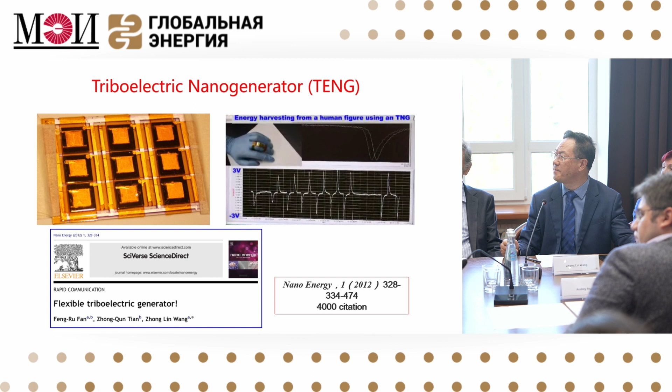And then you ask, what's the difference compared to what we have? What we have now is the electromagnetic generator, first invented by Faraday in 1831. It works well for higher frequency mechanical triggering, meaning with a steam engine you can do that. But for the energy distributed in our living environment, the efficiency is so low because the output power is proportional to the square of the frequency. Our TENG on the right-hand side is a new way because it converts unconventional, low frequency, low amplitude energy into effective electric power. We first invented it in 2012.

Now, what's the big difference compared to what we know? The first one is frequency dependence. It's very good for low frequency triggering, giving high output power compared to traditional technology. The fundamental principle is different: it uses the triboelectric effect and electrostatic induction, two effects, rather than electromagnetic induction. So the physical principle is different, and the performance, of course, is different. At low frequency, the performance is 10 times that of the electromagnetic generator.

The other one is amplitude. When the energy in our environment is at low amplitude, how do you convert such energy to electricity? We found for low amplitude, the performance is 5 to 10 times better than traditional technology. The other one is energy conversion efficiency. With a lower power input density, the conversion efficiency is 3 times better than the electromagnetic generator, even using today's most powerful magnets.

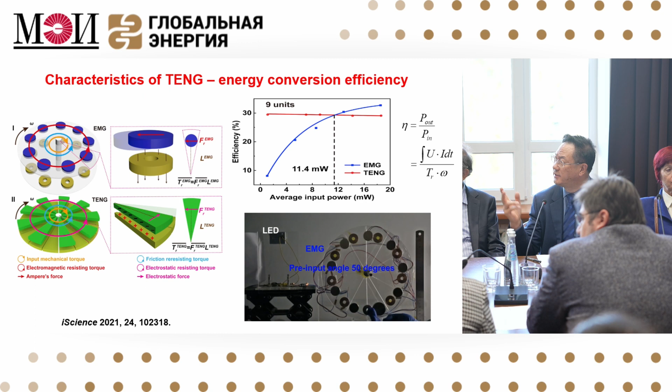Our performance here is high. So this is something you probably never heard of: a new way to convert energy into useful power. Okay, and this is the basic principle to compare. They say what material you can utilize.

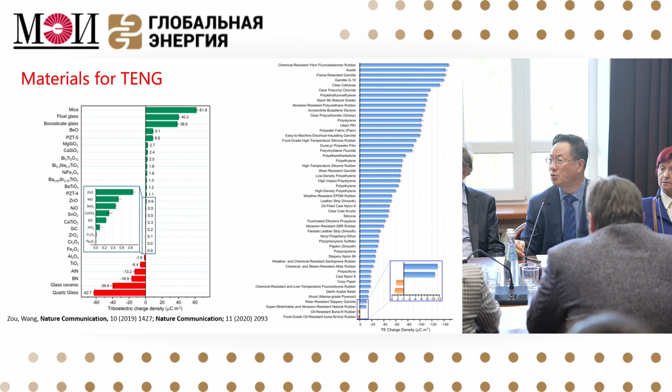A lot of cases say, oh, we use magnet coils, but this one no. They use organic materials, the materials we use in everyday life, fabric, a lot of things. So this material choice is broad, from organic to polymers. We use the triboelectric effect. So the material choice is broad.

So worldwide, since we discovered the nanogenerator in 2006, now 16,000 scientists from 83 countries and regions are working on this technology and related. Over 15,000 papers have been published in this field since our first paper. So it's a new way to utilize energy, different from wind, different from solar. Those you call new energy, it's just new compared to the fossil energy we use, okay? So this is the worldwide impact.

What's the application? First one is small powers. The second one is sensing technology. As we move into the smart city, smart society, artificial intelligence, we need sensors. This is a very good way to do that. I want to give you a fundamental impact of our science, okay? So what are the basic things this invention impacts in our science? Let me show you the impact.

Well, triboelectricity, everybody knows that. This has been around for centuries. But what's the physics behind it? Whether it is electron transfer, ion transfer, or material species has been debated for centuries. Until very recently, we found this is mostly electron transfer, because when you put two things together, triboelectricity occurs. Why? The atoms have been so close that the electron can transfer from one to the other. We did the spectroscopy analysis and found that's the case.

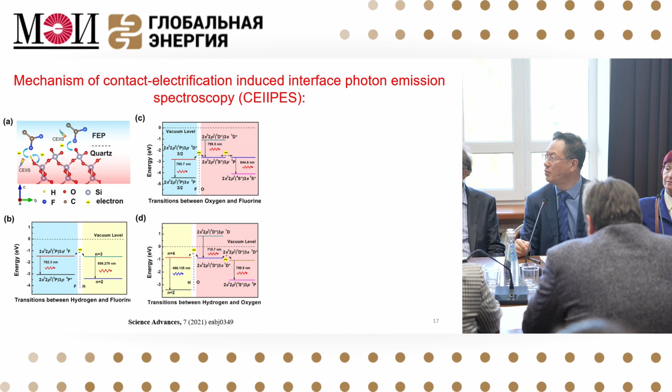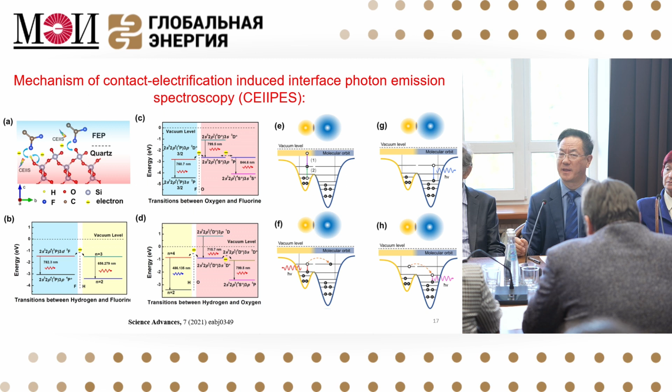The second one is, when these two things are together, if you have electron transfer, do you have photon emission? We measured that and found it truly has photon emission. So across the atoms, electron transfer and transition result in photon emission. We verified the model we proposed. So if you say something new, the science has to be new. Otherwise the technology is just incremental advances.

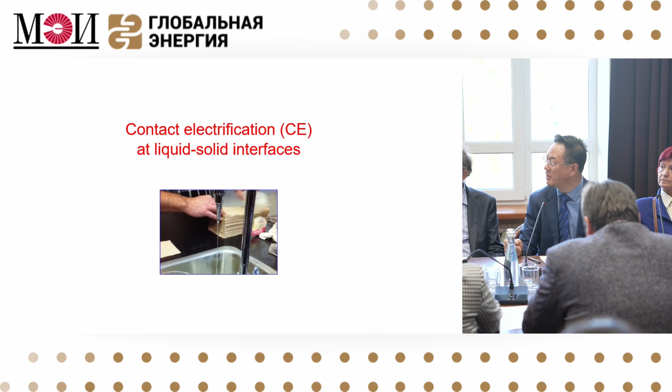Okay, so the next thing is, how about liquid and solid? Triboelectricity occurs not only between solid and solid, but also between liquid and solid. It's happening in our daily life. This is a very fundamental thing in chemistry, the so-called electric double layer. All chemistry and chemical engineering students study this, but it is subject to revision, because it is not only ion adsorption for the electric double layer, but also electron transfer.

So we did this experiment. We put a droplet of water on silicon dioxide and found that there is electron transfer. We can measure the charge decay mechanism as a function of applied temperature. And we verified there is both electron and ion transfer. That's why for electrochemical storage a lot of systems are unstable, because of electron transfer at the interface, which is something we did not believe before.

And we also tested different materials. Does this principle apply to all the materials or just a few select ones? We found it is a universal model. Not only silicon dioxide, but magnesium oxide, silicon nitride, titanium oxide, all this kind, it is very universal. Then, well, if water transfers electrons to a solid, is this true?

We used to believe no. We said water cannot become ions, but now it can. Water loses one electron and becomes a water ion. But the lifetime of the water ion is only 200 femtoseconds. A few years ago, experiments found this is the case. So water can lose electrons and become ions, but what does this ion do? It combines with other species in water and becomes radicals.

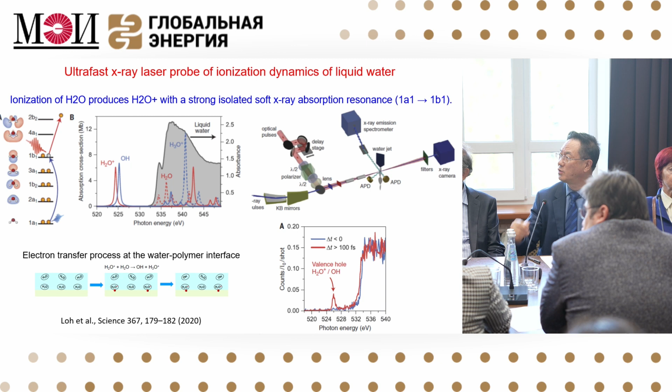So this is what we found just from a physics point of view, chemistry point of view. And this does support one. So therefore, we revised the formation mechanism of the electric double layer at a liquid-to-solid interface, because as you have electron transfer, some of the dynamics at the interface will change, because you have both electron transfer and ion transfer coexisting. So this is the first thing I want to show you, the fundamental impact due to the TENG invention.

The second one is what you can do. This can provide a new way to measure the charge transfer between liquid and solid quantitatively. When you have a water drop flow down, you can map the charge distribution as a probe for fundamental chemistry study.

They say, well, did we know about this before? When you do a chemical reaction, you always study the chemical reaction, but you don't know that there was an electron transfer. We measure this; due to charge transfer, you can light up a light. So something we used to do every day, but we didn't realize there's electron transfer involved until we found a reason for that. So I just give you a little basic of the science we found. Okay, so this is the scientific innovation.

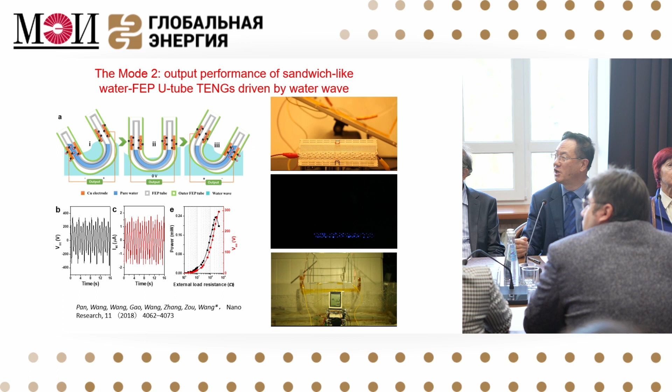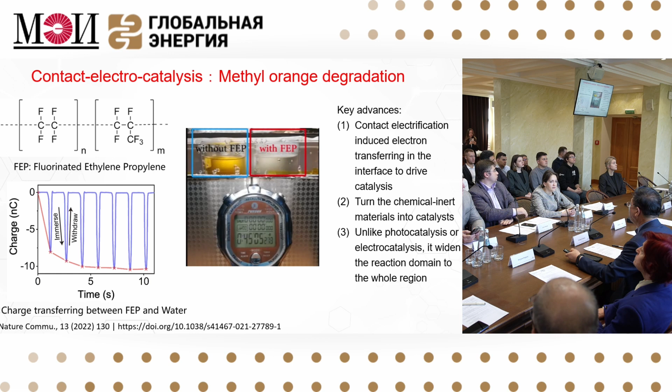Okay, the second one is: can you do catalysis using contact electrification? Because in nature, how does catalysis occur? It is contact electrification. We don't have the expensive man-made catalysts, but this has happened. We found it for methyl orange degradation. If you have FEP beads and you apply a sonic wave, it degrades. That's what happens in nature when chemicals degrade.

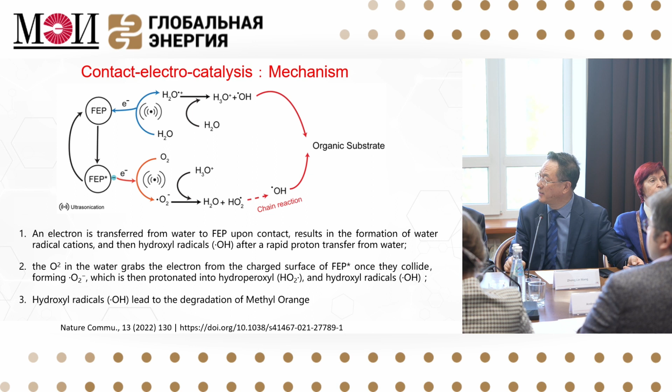So what happens if you have FEP beads? In contact with water, water loses one electron and becomes a water ion. The water ion combines with a water molecule again to form radicals. And then the FEP under the sonic wave releases the electron, and the electron combines with oxygen to form new radicals. That's the cycle that happens in nature. So flowing water never gets deteriorated, because you have electron transfer between water and substrates such as stones, right? So this is from a new principle.

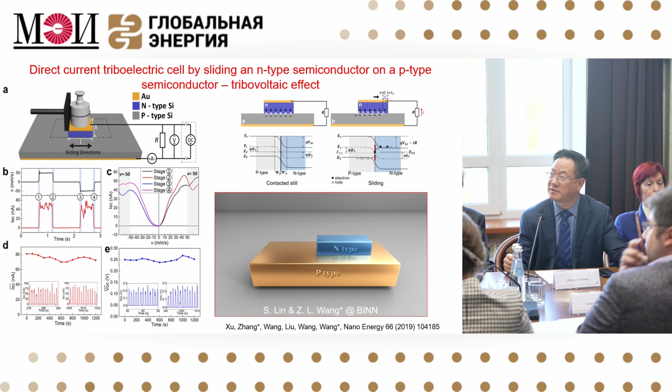We also found a new effect, the tribovoltaic effect. We know the photovoltaic effect: photons shining, you get DC out. But tribovoltaic can also happen. If you have an N-type semiconductor sliding on top of a P semiconductor, you have a DC current come out. This is something we didn't know before. Just 3 years ago we found that if you slide P on N, you can have DC current out. This is a new effect called the tribovoltaic effect, and it can be used for sensing and also for semiconductor data reading.

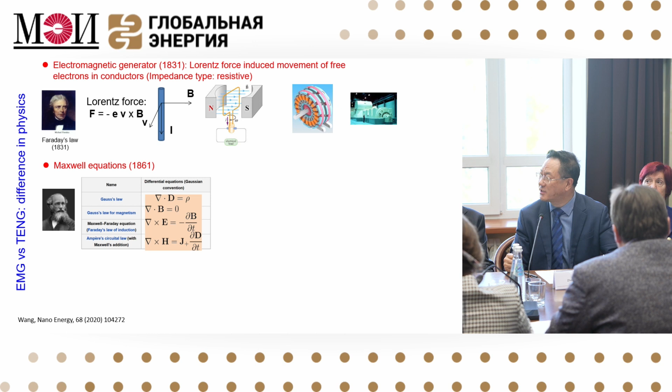Okay, so this is chemistry. How about physics? How do you impact physics? This comes to the theory of electricity and magnetism. We want to quantify that. If you have a conductor that cuts electromagnetic flux, you can generate power. We've known that for decades. Now, there are two kinds of current. One flows through the wires; that's called conduction current. The other is called displacement current, which is transmitted through space, which Maxwell invented in 1861.

But those equations were derived on an assumption. They assume all the media are stationary; nothing moves. All electromagnetic theory is derived on that assumption, but this assumption is rarely mentioned in textbooks. Students just accept it as it is, okay? So now we say the media is moving. You have to revise the displacement current, which was first unified in the 1900s, 120 years ago.

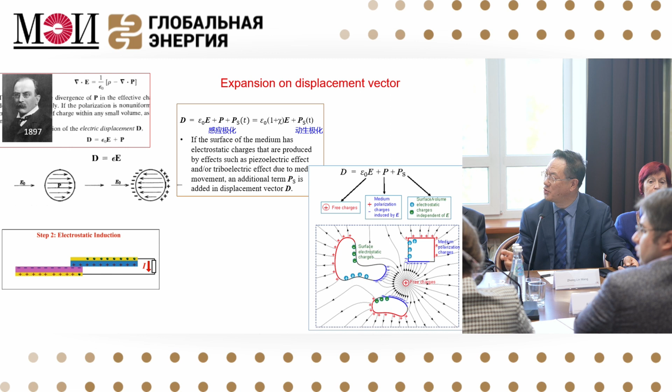Because the media is moving, besides the displacement vector, you have to introduce another term due to motion. If you have relative motion between one and another, you have to add another term, with which we are able to quantify the output power of a TENG. So from the experimental side, I propose a new theory, adding a term to the equation. This shows the fundamental impact, with which we can quantify the TENG output and compare with theory, and it progresses very well.

However, as you advance, new experiments show new challenges. And the challenge is this: media motion can give you electromagnetic radiation. Let me give you one example.

If you have a windmill around you, this thing rotates and affects animal behavior and human behavior nearby. Why? You have low frequency electromagnetic radiation. So this is generated by motion, but this was not included in the original equation. They did not consider this in Maxwell's time. But now you have to, because we measured this experimentally.

I want to show this subject to students. You can learn from classical physics, but at the same time, it's subject to expansion. So we found experimentally that we can transmit power using medium motion. Another one is that we measured this underwater. If you have voice sounds to a TENG, it generates displacement current and can transmit a signal underwater a few meters away. This used motion of the medium for electromagnetic wave radiation.

This is something we didn't know very much before, and we measured this experimentally, which makes us rethink the theory. Can we expand it? This is the experiment; we observed this due to medium motion. However, if you look at textbooks, they say all these things come from the flux rule. The flux rule was presented by a Russian scientist, Lenz, many years ago. That's the power. All power generation is based on that principle.

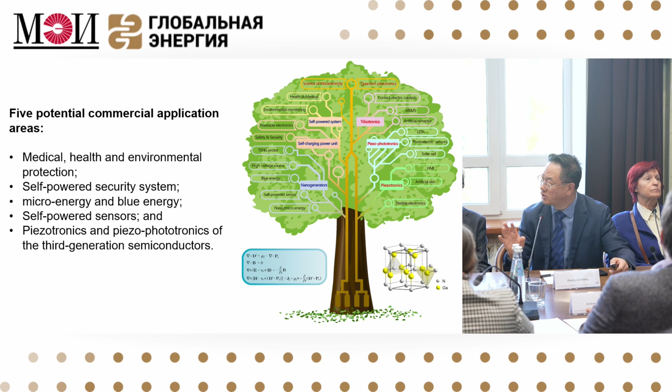First one, pacemaker. 14 years ago, I started with students: can we make a pacemaker self-powered without replacing the battery? After 11 years of work, we did it. For the first time in the world, using our TENG, we can make a pacemaker self-powered continuously. So this has impact on implantable medical devices, a new way for healthcare. So this is the first thing I show you, the self-powered pacemaker.

The second one is infrastructure. You can have meters for everything: water, oil, and gas. But you have to send somebody to read them, to give you the numbers. Now, what's the flow rate? What's the flow speed? What's the pH? What's the chemistry of the water? Can you do the analysis remotely, especially underground? Today a lot of infrastructure is underground. You cannot send a human to do that.

A self-powered chemistry and flow measurement system for water. We made this possible right now. We have already set up a company to commercialize this infrastructure monitoring system. For a whole country, like Russia, a huge country, how can you monitor many things across long distances? It becomes a challenge. So this makes use of the TENG-driven self-powered system.

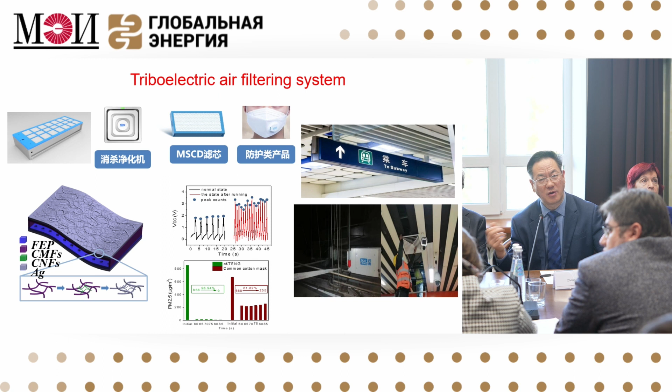The next one is the air filter. About 7 years ago, China had a pollution problem. Now it's much better. How can you do pollution removal and air filtering? So we started this company 7 years ago. Now subways and office spaces already use the triboelectric air filter, already commercialized and on sale. Now we're already in business. So this is triboelectric air filtering, utilizing the principle.

The other one is medication. Especially for Chinese medicine, they have to diagnose through the pulse, but measuring the pulse becomes a challenge.

Only a skilled person with many years of experience can tell you something about your health problem, but that knowledge is unable to transfer from one person to another. Can we digitize this? Can we make these things transfer? The younger generation can learn from the old generation without going through many years of experience.

So we use this technology to develop medical devices to quantify and digitize that. This is one example, and the other one is the patch. Sometimes when we do sports, we feel muscle pain, and we put a little patch on top of that for pain relief. We use TENG to stimulate the penetration of the drug into the skin much more effectively, 5 times faster.

We also have the professor's beauty supplies. This can get rid of wrinkles and make the skin younger and healthier, using this field stimulated medical device. Same principle, but it depends where you apply it.

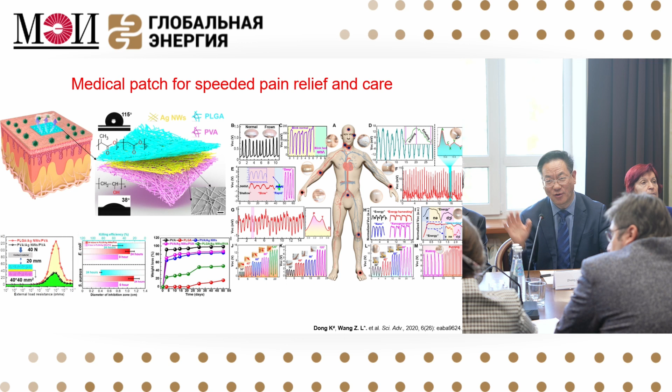And then you have healthcare. Some people have a leg problem. You go to hospital - how do we know about recovery? So we make these sensors at the joints. If recovering, they can tell you how many cycles and how much force you apply during recovery. This is all needed for robotics, as well as healthcare - they need the sensors.

If you use an electromagnetic generator, it's very heavy, bulky, and consumes a lot of power. But using plastic, it's very light and useful. This is the principle we invented, TENG, in this process. Okay, this is for healthcare.

We could put it in shoes. And when you're walking, the shoes can enable GPS positioning, because the power put in the shoe insole, as you're walking, gets automatic location tracking. This is for elder person care, as well as children's care. This is small power, but useful for some purposes. GPS positioning, self-powered shoes for that.

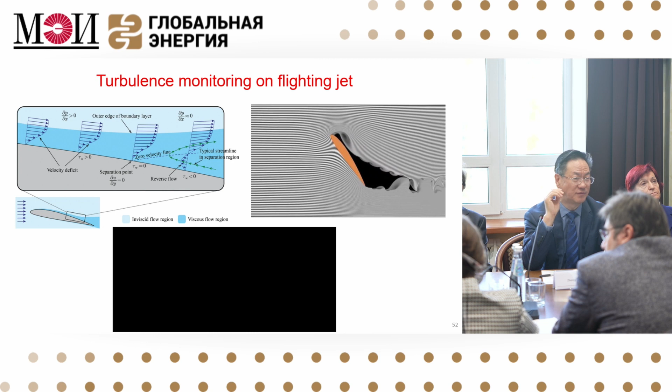Even for aircraft, turbulence happens. But monitoring turbulence is always based on simulation - you cannot do that accurately. So using our TENG, we put it on the surface of the aircraft wing. This is a simulation - you can see when the aircraft wing angle changes, turbulence occurs, but it's not good for flight safety.

They put a string on the wing and just watch how the string flicks - they can tell you about turbulence, but it's a non-digital way. So we put this in a digital way - the TENG is put on that. When the wind goes through, it detects normal pressure and flow speed as well - all these things can be detected. So it can transfer to the aircraft industry as well as other machines. This is the way we invented it for the first time for this purpose, for aerospace engineering.

You can see, not only for power, but for sensing. So this is the turbulence monitoring on flights.

Anything you can think about - environmental monitoring. We can make this little wind generator, put carbon monoxide sensors, so you have a box that can immediately send to the cloud the concentration of carbon monoxide. Especially today with carbon neutralization - do you know how much carbon you emitted? You can only estimate from GDP, but GDP is not a measure of carbon emission, okay?

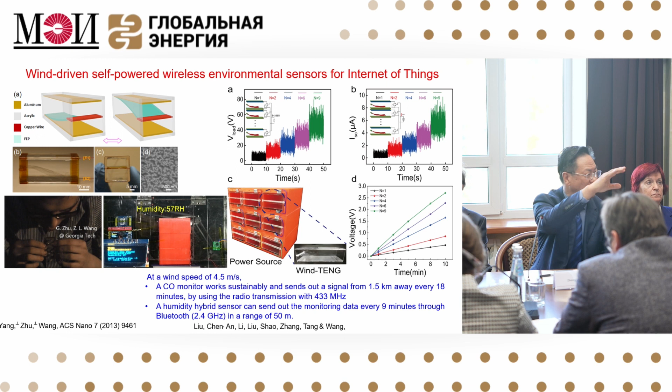But you can locally distribute that, you can measure this, you can see which area has more carbon emissions than other areas. So a self-powered system for environmental monitoring - gas, chemical, fire, anything. Especially in a vast environment, who's going to go there to check if there's any fire or anything happening? Use distributed self-powered sensors - you don't need to maintain them in any short period of time. They just send signals automatically to the cloud, and you get it at the same time.

Now, how can our invention make human society sustainable?

Can we make something for the future of energy? Let me show you the potential. There's a report between the Chinese Academy of Science and the European Academy of Science that says the possibility to substitute fossil energy is to use ocean energy. This is the future. We've used up all what we have on land. Where are the ones left? In the ocean. But the ocean is very complicated - it's vast, low frequency, random, but deep and complicated environment. Still, that's what we're going to have for the future.

So when are we going to need this? I think we need it right now, because we're going to run out of fossil energy by the end of this century. How many years left? 70, 80 years. It's very short. So if we don't develop something innovative and creative right now, we're going to run into a problem by that time. This is the blue energy dream we want. But we know we want it - how do we do it? A lot of things, how do you do it? The politicians tell us we need it, but how to do it? The ocean has 76 terawatts, which is 4 times world power consumption today.

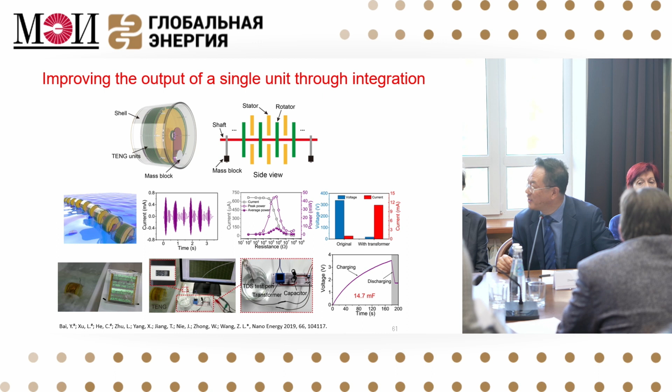Then the other question is, how can you make this sustainable so that it lasts for a very long time? So not only do we make a big ball, we make small balls - many balls in the volume. In the water, you're floating like that, with many things moving inside. But this whole ball is packaged, so as long as there's no water infiltration, you're fine. So outside, if any debris grows on it, it does not affect the action inside. This is the ball's 3D design.

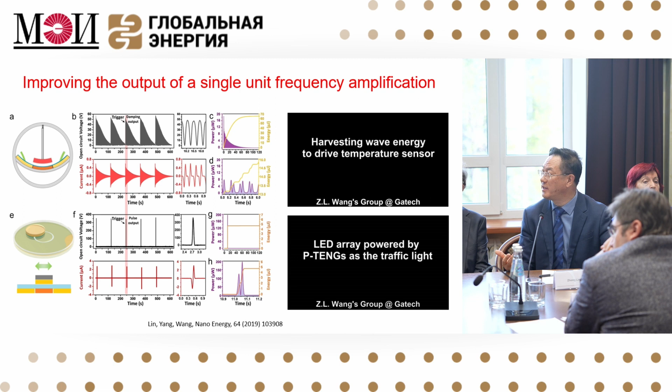In the ocean, the wave goes at a very slow pace. Can you accelerate that? So we use a pendulum structure - we're able to accelerate the motion, so you'll be able to improve the output performance dramatically, because you accelerate the movement using this pendulum structure.

Even if the water strikes once, this thing can oscillate for many cycles. So this is the way we develop for high output. If you struck this one, this pendulum structure oscillates for many cycles, and we can get a total energy conversion efficiency of 28%. This is at a low pace, and this number is phenomenal. You can integrate this across the board and achieve this phenomenal performance.

We have to do everything ourselves, because there's nothing available in the literature we can look to. So we have to do this with our own team. This is 28% efficiency at the beginning.

Then did you get any success? Yes, we put it in the ocean. You see the ocean wave there. We're able to generate, per cubic meter of water, a peak power of 80 watts. This is measured. On average it's 13 watts per cubic meter.

Traditional technology can give you about 5 watts, so even this number is 2.5 times that of traditional technology, even though they have developed this for centuries. But this is just the beginning. From an idea to today, it's only 6-7 years.

And it works. They make this light tower powered by it. The battery for this light tower can be systematically charged by this water wave energy power generation. So this is the beginning. It shows you the life for the future.

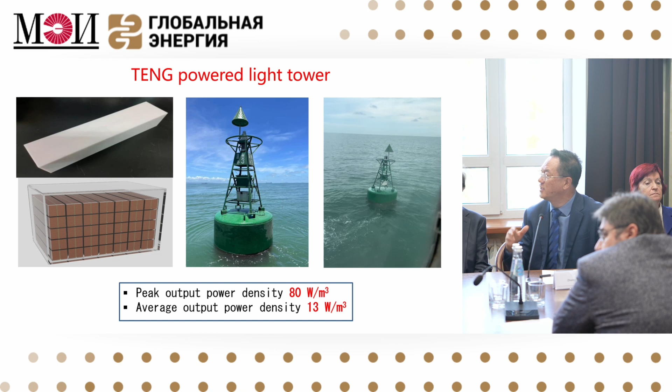We demonstrated this recently. You see the box we made. In the future, let's look at how much power could be generated. I'll just use a simple example: if you have a surface area of the ocean like Beijing city, and use 1 meter depth of water, the power generated would be 20% of the power consumption of China. But for the ocean, there's a lot of unused space.

It just sways there. Gravitation is there, right? But gravitation is always present, so this is also sustainable—day, night, continuous. Evening is even better because of the moon's motion, which helps even more. So it's sustainable, constant, and independent of weather. With solar, today is a good day, but yesterday was not a good day—it's unpredictable, unstable, and very hard to integrate into the grid.

So if this can be made possible, we can integrate this power into the grid along with other sources. I predict this is the blue energy dream for the future, and we're going to work very hard toward this dream. This just shows you the way we do it. So what's the solution? It's called hybrid: we have solar, wind, and water wave energy, called blue energy. These three can be integrated together to form an integrated approach for the sustainable development of humankind.

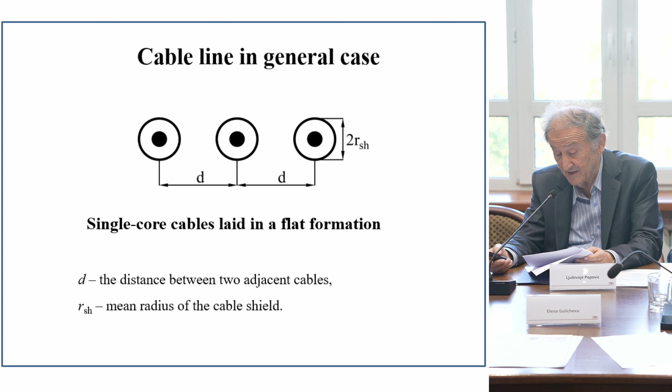Thus, if we perform a simulated ground fault and assume an arbitrarily large number of surrounding metal installations, the previously presented equivalent circuit should be supplemented as shown in the next figure. This equivalent circuit is complete from the standpoint of the number of its elements, but is not without some idealization and approximation of the real electrical circuit.

The fact that some of the metal installations are grounded at certain places has been disregarded. However, this fact is not important because we analyze only the induced currents that, as is well known, circulate only in the axial direction through the conductors, and as such cannot produce any potential on them toward the earth. Also, due to this, it is not relevant whether these installations are insulated or not.

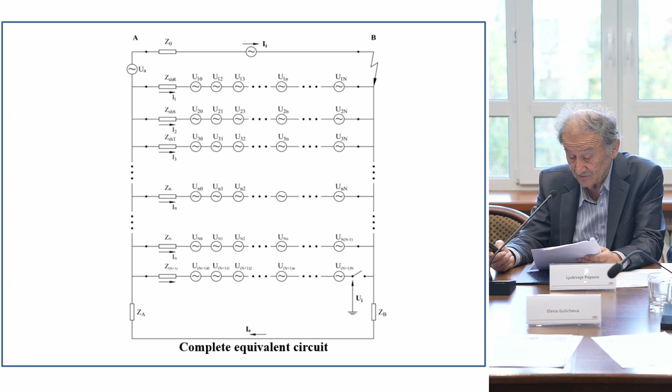Based on the measured values of these two currents and the analytical part of the methodology, it is shown that any other data about the surrounding metal installations are not necessary. All of them are implicitly involved through the values of these currents. These are the currents on the top of the equivalent circuit. The analytical part of the methodology is based on the introduction of an equivalent conductor substituting all surrounding metal installations from the standpoint of their inductive influence.

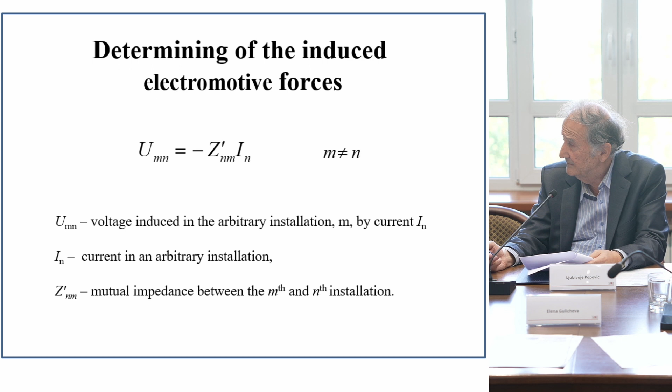The only measured quantities are currents through the phase conductors, by ammeters. As can be seen, the additional phase conductor is connected at its ends in such a way that it represents an additional neutral conductor during the measurement.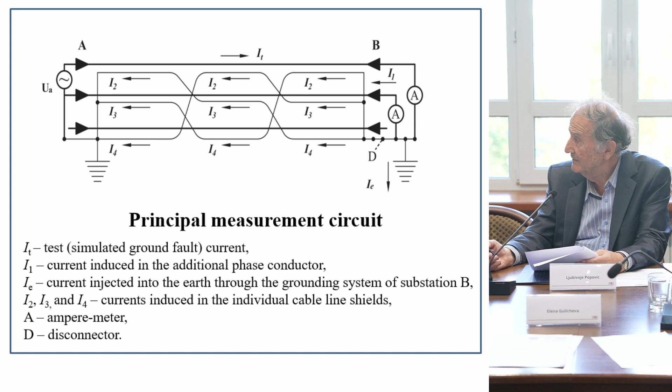When we introduce an equivalent circuit, the considered cable line prepared for the measurement can be presented as a relatively simple equivalent circuit shown in the next figure. Yes. The previously given equivalent circuit is much more complicated than this one, but it is reduced by introducing this equivalent circuit to this one.

Based on this one and the previously presented complete equivalent circuit, it is obvious that the arbitrarily large number of unknown induced currents is substituted by only one induced current, II. Also, numerous known and unknown surrounding metal installations, including shields of the considered cable line, are substituted by only one equivalent conductor, or circuit maybe also.

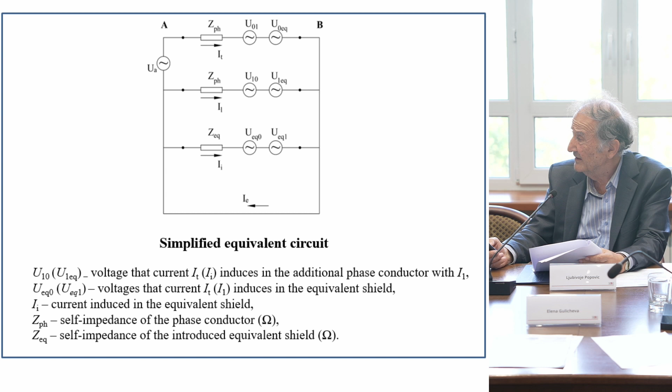This conductor has to satisfy the condition that currents IT, I1 and IE remain unchanged after its introduction. These are the conditions of equivalency. According to the simplified circuit, this condition can be expressed by the following system of equations. Thus, all the previously shown circuit can be expressed only by these equations with unknown quantities.

The analytical expressions for the impedances of the phase conductors are well known and presented in these equations. These are well-known expressions based on Carson's theory of current return path through the earth. Then, however, for solving the previously presented system of equations, it is also necessary to have the analytical expression for the self and mutual impedances of the introduced equivalent conductor.

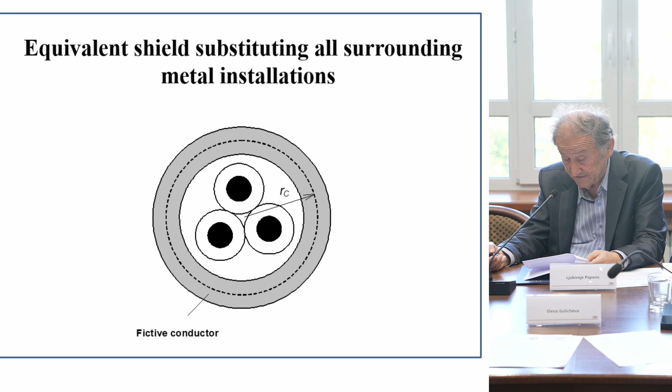However, the equivalent conductor imagined in the finally developed methodology is somewhat different, as shown in the next figure. The additional phase conductor in this figure is marked differently, in a lighter shade, to indicate that it serves as an additional neutral conductor for the purpose of the necessary measurements.

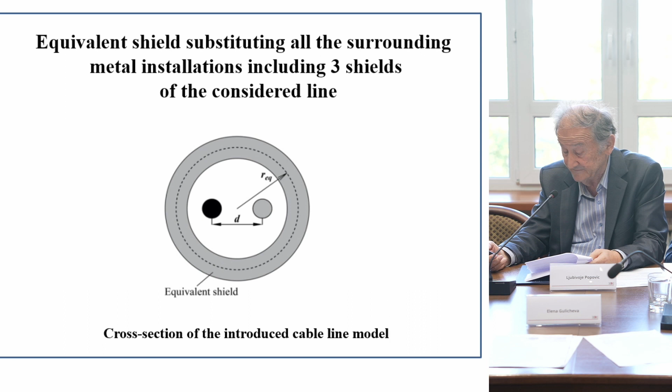Thanks to the line model formed in such a way, the necessary analytical expressions become known in advance and are presented in the next slide. These are equations that give the relationship between the parameters of the desired equivalent conductor. On the basis of these expressions and the measured currents IT and I1, the previous system of 2 equations can be presented in the following manner.

Since the presented equation gives the relationship between complex quantities, it can be presented as a system of 2 equations in which RE and IM represent the real and imaginary parts of the given expressions. In this system of equations, according to the previously given analytical expressions, the only unknown quantities are the longitudinal resistance and mean radius of the introduced equivalent shield. Instead of an equivalent conductor, we imagine an equivalent shield.

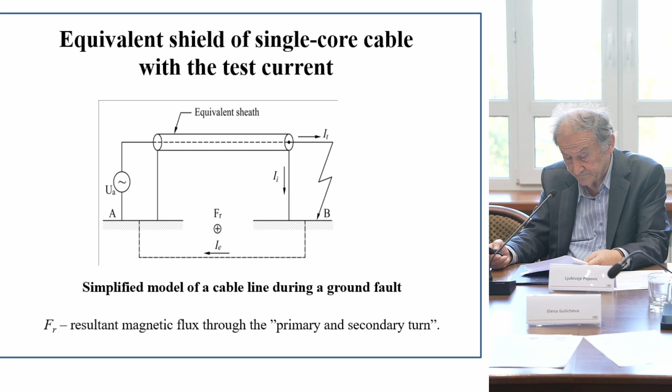All other metal installations, including the sheaths of the considered cable line, are involved in this only one equivalent sheath. During normal operating conditions of a cable line, we have inducing currents in all three phase conductors.

In that case, the total inductive influence on an arbitrary surrounding metal installation can be determined by superposing the voltage and current induced by each of the phase conductors. Each induced voltage determined by the presented procedure has to be superposed with the other influences, induced voltages or currents, determined the same way, depending on what you want to have.

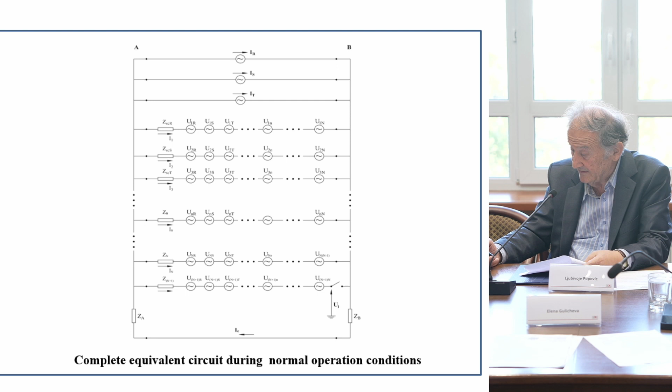Then this transformation reduces the problem of determining the series and sequence impedances of the cable lines to the simple case from the standpoint of the necessary calculations. This is the case when only the considered cable line exists in the whole surroundings, and when the cross-bonding technique is not applied. But with these transformations, we obtain data for the cable line in normal operating conditions.

But determined in such a way, the shields of the cables include the influence of the surrounding metal installations. For the reason of increased security, the series impedance should be calculated using the parameters of the equivalent shield that corresponds to the single core cable that is under the smallest inductive influence of the surrounding metal installations.

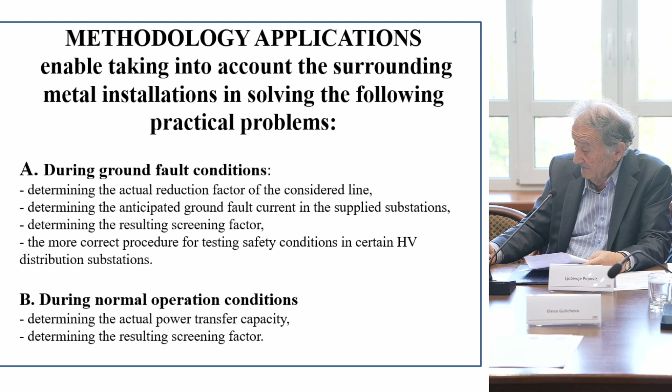During normal operating conditions: determining the actual power transfer capacity and the resulting screening factor. Finally, quantitative effects. Quantitative effects of surrounding metal installations depend on the degree of urbanization, but on the basis of experimental measurements performed in the power distribution network of Belgrade, we obtained that it can be up to 40%. This is a pretty large enlargement.

But the influence on the ground fault current distribution is much larger. It is shown that the current passing to the ground is 5 times less than was considered before. This dramatically changes our perception of this problem all over the world. People think this problem is 5 times greater than it really is. The same situation is with the inductive influence on any one surrounding metal installation. That's about 5 times less, in areas with a high urbanization level.

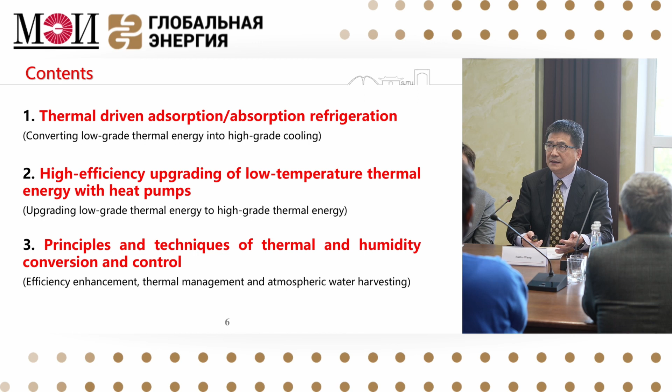When I got my PhD in 1990, there was a new Chinese solar heating industry, and I collaborated with them. This industry grew very quickly. When we had enough solar collectors, we needed to consider whether this solar heating could be used for cooling in the summer. So I first did research on thermal-driven adsorption refrigeration.

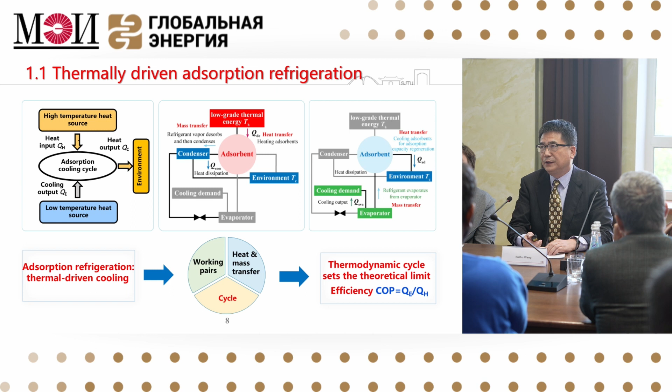So using silica gel water, or activated carbon ammonia and activated carbon methanol, for example. So we developed this kind of system, and especially to make a cycle, because we need to have an adsorption process. It's intermittent. So when there is adsorption, it causes evaporation or cooling, but the other adsorbent bed you need to heat to be regenerated, and then you get condensing. So with these two adsorbent beds, we could make switches, in this case to give the cooling function continuously.

So in the early research, many people considered that if you have two adsorption beds, you need to consider heat recovery. In this case, you could use the desorption bed with high temperature, so you take some heat recovery to power the adsorption bed for the second generation. So this way we make good use of temperature potential. This is so-called heat recovery. So my invention is something different.

Based upon this, if we have two beds, what you could see is that when one bed has finished desorption, you get the pressure at the condensing pressure, while the other bed is in adsorption, so it works at evaporation temperature, evaporation pressure. So we still have the pressure potential difference. So I considered whether you could move the vapor from the high pressure bed to the low pressure adsorption bed. So we just make a connection between these two beds, and just before the switching, you move some vapor and direct it to the other adsorption bed.

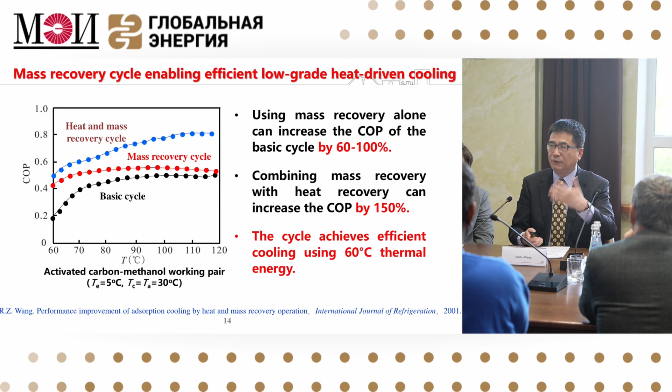So then, in the year 2004, I designed and manufactured such a system. And this system shows the operation with two beds, so we have a single bed with a condenser and evaporator, and it goes between these two processes. And we have so-called mass recovery, and usually this is powered with solar heating at 60 to 85 degrees, and for cooling to generate about 10 degree chilled water, the COP value could be about 0.4 to 0.6.

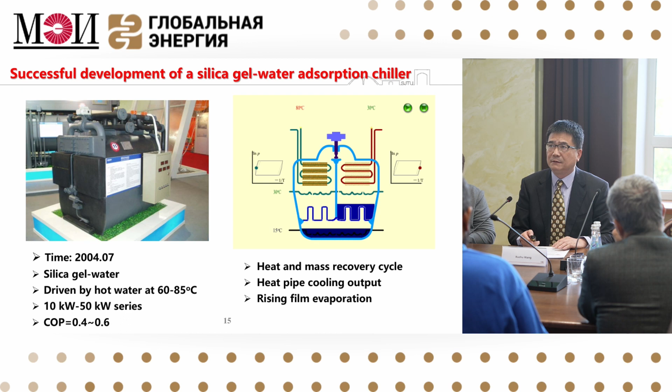So then based upon this research, we continuously developed a lot of units, adsorption chillers and also adsorption ice makers. And I also wrote a book called Adsorption Refrigeration Technology: Theory and Applications. And what I found is that these mass recovery cycles are now commonly adopted for every kind of adsorption chiller in the world. So all the chillers available in the market use our mass recovery cycles.

Originally I paid attention to how to make efficient use of solar heating for cooling in summer. But really, that's a problem, because summertime is not a long time, so for solar cooling the payback period could be long, maybe 5 or 6 years. So then I considered whether it's possible to find industrial waste heat. If you have such waste heat, you could use it for heating and cooling all year.

Now we have data centers. Data centers now have about 50 to 60 degree hot water. Usually the hot water goes to the cooling water tower and is cooled down to about 30 to 40. And then this water comes back, and electrically driven water chillers cool it down to about 20 degrees, and then it goes to the air conditioners or air-cooled racks for cooling.

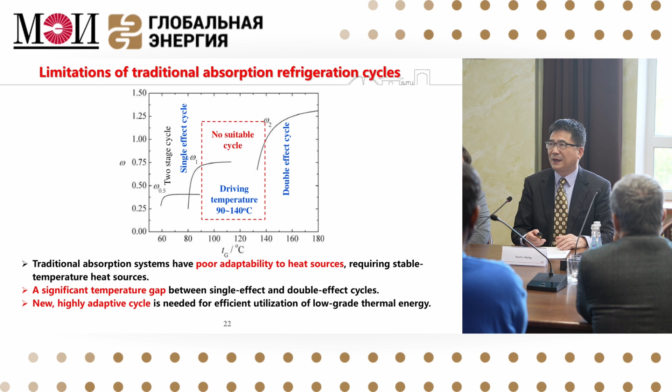So in this case, I suggested the so-called 1.N effect. Then later, I renamed it the so-called variable effect cycle. This solved the problem - we just added a high pressure absorber, HA, and then a second low pressure generator.

So by the generation at the high pressure, high temperature generator, the steam vapor pressure is not that high. But if it comes to the high pressure absorber, we could still generate this kind of absorption heat with a temperature more than 85 degrees.

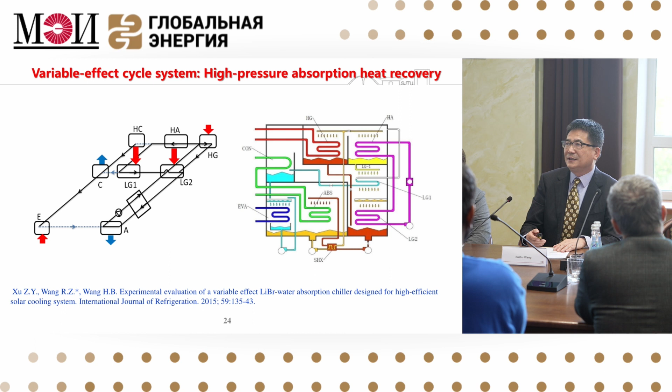So in this case, we could develop such a system, and on the normal used system we just added on the right side just 2 heat exchangers with a pump to circulate the absorption heat to generate the low pressure, the second generator. So in this case, we could create this effect, especially for solar utilization for cooling, for example.

So if the heating source is between 90 to 140 degrees, now we could get a COP value depending on the heating source temperature. In this case, the COP we could see ranges from 0.7 to 1.08, this is for 120 degrees centigrade. So in this case, we created and also commercialized this kind of variable effect lithium bromide water absorption chillers.

In this case, we could make good use of the thermal grade of heat.

For this research work, I received contributions and the award from the Institute of Refrigeration of UK, the J and E Hall gold medal, because we developed new ways for efficient cooling for air conditioning with adsorption chillers, and also the International Sorption Heat Pump Conference Georg Alefeld Memorial Award.

The second thing I want to say - the first was for cooling, the second I consider heat pump, upgrading the temperature. If we have waste heat, is it possible to upgrade it and make it useful again? So this is the so-called high efficient upgrading of low temperature thermal energy with heat pumps.

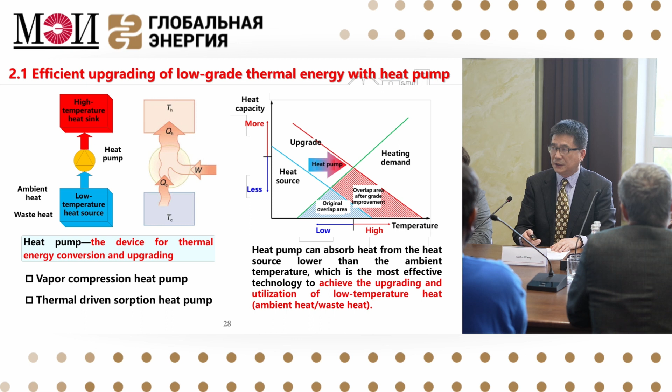So in this case, 1 kilowatt heat electricity, if it's electric heating, gives 1 kilowatt. But with a heat pump, 1 kilowatt could absorb, for example, 3 kilowatt from the air source, then release 4 kilowatt for heating. So this is the concept for air source heat pump water heaters, with a COP about 4.

With this kind of concept, I needed to commercialize this and develop this kind of infrastructure. I made commercialization in the year 2003 - that's the first manufacturer in China using air source heat pump water heaters. In 2011, we considered this kind of air source heat pump with hot water as a hydraulic system for space heating of buildings with a fan coil unit. In 2018, I did another research because I considered air source heat pump could generate hot water and space heating, and whether it's possible for steam generation.

So this third project is about steam generation, meaning we need to get the temperature lift to more than 100 degrees centigrade. In this case, we tried the possibility to replace coal-based boilers, because for decarbonization, it's so important.

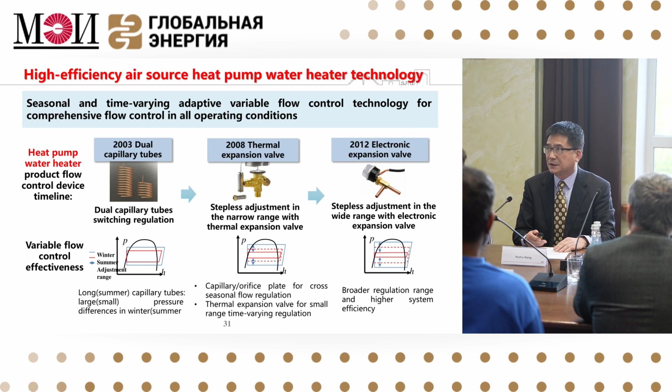Later, we tried thermal expansion valves, also in combination with capillary tubes. After 2012, because electronic expansion valves had matured and became market available, we could make good use of this kind of expansion device.

This technology developed, and we also did research on the hot water tank, because we use a heat exchanger inside the hot water tank. Normally, due to the temperature difference, hot water rises to a high place and low temperature water stays down. So we needed good design of this kind of heat exchanger to spread properly. Originally we were using circular heat exchangers, but then we considered maybe heat exchangers for high temperature were not that important.

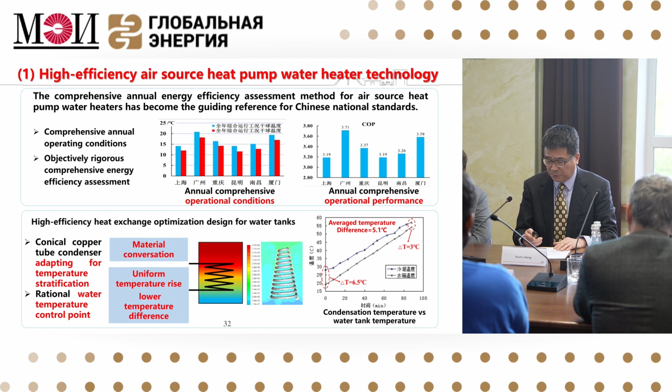So then we used this kind of conical design and tried to reduce the copper tubes. With these changes, the company was very happy, because they would save 100 RMB yuan - this is a real benefit for the company. If we do not make this design, efficiency is nearly the same. So this decision was based upon the requirement and also consideration of the company's benefit.

In the year 2011, we started new research work for the hydraulic system with a small temperature difference fan coil unit, because originally heating with a fan coil unit needed 45 degrees hot water to heat. But I say we only need 20 degrees for room space heating. Why do you need 45? If you reduce to 35, the efficiency of the heat pump will increase 30% or more.

So I proposed this kind of concept, developing the system just by making changes to the terminal, the heating terminal. We call it a small temperature difference fan coil unit, achieved just by increasing the heat transfer alpha value and also increasing the heat transfer surface.

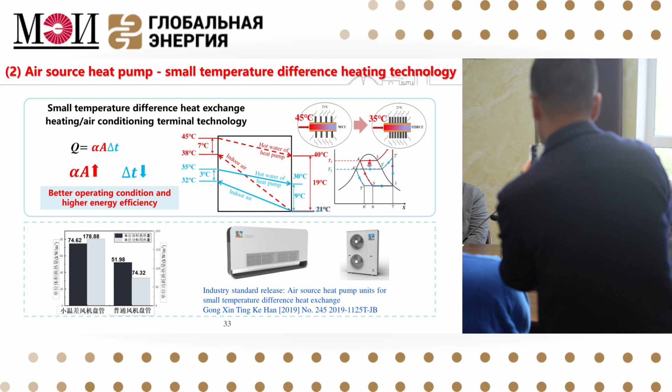We used enhanced heat transfer fins and also reduced the diameter of the water tubes. With these changes, we made 35 degrees hot water possible for space heating. I also made a comparison with, for example, cast iron radiators, which are quite popular in China, especially in North China, and normally used in richer families. We proposed this small temperature difference fan coil unit to try to solve the problem and also reduce the cost.

And then we made the test inside the room, comparing these 4 types of heating terminals. The result shows our small temperature difference fan coil unit is more efficient and very close to radiative floor heating, but it still has a very good function for cooling in summer. So based upon this concept, now we have a Chinese standard to promote such kind of technology.

My third talk is about the air source heat pump for steam generation, because in China for decarbonization, coal-based boilers are very popular. So we made an investigation of the thermodynamic cycles, especially for input temperature below 40 or 50 degrees centigrade, and it's not possible to get output of 100 degrees or more. But this is what air source heat pump for steam generation needs - we need this kind of technology.

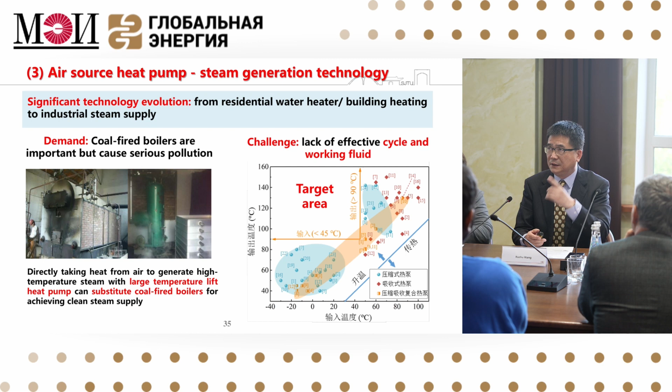When it's realized, we are very happy, students also very happy, because we realized that water evaporates actually at 80 degrees, at that time water is at vacuum pressure, and then goes to 120 or 130 at high pressure. So in this case, we need to overcome a lot of difficulty for the compressor and also the system.

So when this is available, then I come to the industry, asking whether you need it. And what I found, the industry said, Professor Wang, we need this technology, but we need heating by steam vapor. Because boilers generate steam vapor for industrial heating, it's very popular, and steam is a very good carrier for thermal heating.

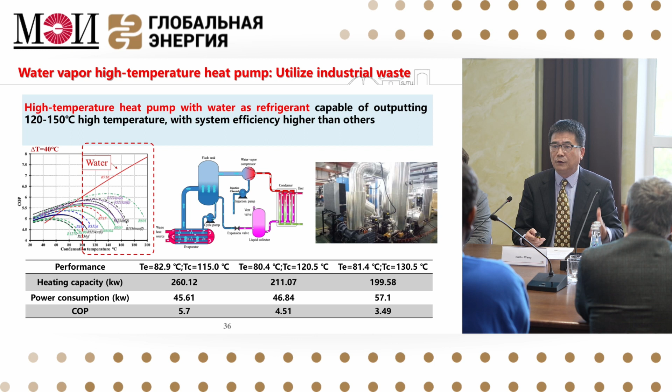So in this case, we need to make some changes. We developed a 3-stage, actually cascade system, and from 2 stages, we get heating from the ambient to get hot water heated to the mid temperature. But then for the 3rd stage we use directly.

This flash vapor, because we could get about 80 or 85 degrees, but at low pressure, it comes to the water vapor compressor directly to generate high pressure steam and comes to the steam pipeline. So in this case, it's very simple. And we developed some technologies for the compressors, trying to make it more efficient and more stable.

And then we had a first example to use air source heat pump for steam generation in a Chinese liquor company, or white spirit - I think the concentration of alcohol is stronger than vodka. What we made was about 65% alcohol concentration. So in this case they need about 120 degrees, and we're using this air source heat pump, also in collaboration with some solar panels.

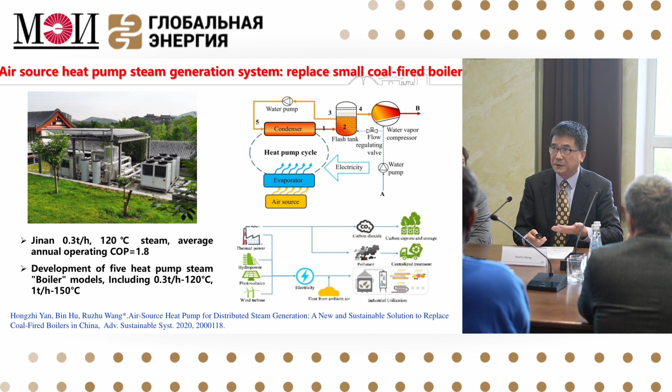This was developed, then tested, and now it's already been operating for 4 years. Based upon this, now this company and Shanghai Jiaotong have established a new company to build such systems, because we find that they have a great market in the future.

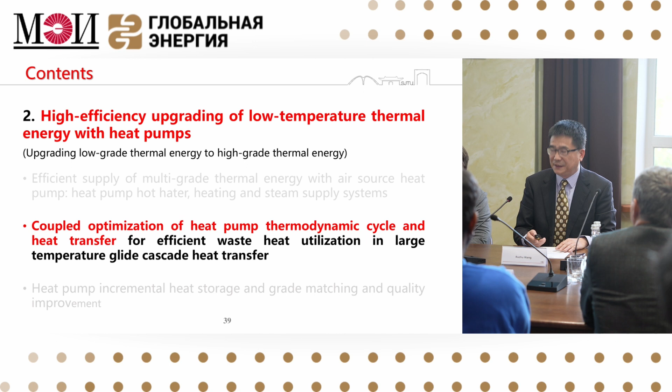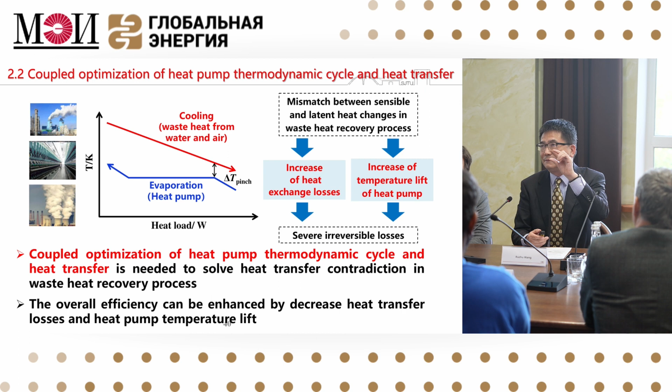So the second point I want to make is about low temperature thermal energy upgrading, how to make it more efficient - this is related to heat and mass transfer. If we consider waste heat utilization, normally if you take waste heat, the temperature will go down. But for our heat pump, evaporation or condensation is at a fixed temperature. So the question is how to reduce this temperature heat transfer difference and increase its efficiency.

So for example, what we developed for the heat pumps is a double evaporation and condensation system. This is for waste heat recovery and also to generate upgraded heating.

And then we demonstrate with a 10 megawatt permanent magnet synchronous frequency conversion centrifugal heat pump unit. So this is the first example that we try to upgrade waste heat from 30 degrees to about 60 degrees for the building heating with 10 megawatt. And the COP value is 6.67. And also the payback period is very short.

It's 1.7 years. So when the customer used this for the first year, they were very happy. So then the second year, they asked us to develop another 5 units. So in this case, total 60 megawatt that's used from industrial heat, and then we upgrade it for the building heating.

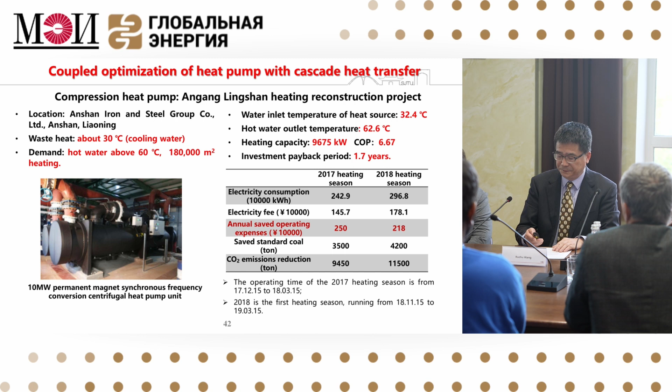And also another project is for the absorption heat pump. In China, especially in North China for the winter heating, we consider combined heating and power systems. So usually in the winter, we take steam from the boilers, coal-based boilers or natural gas boilers. So for the condensing, to get the return water from about 50 degrees, increase to about 105 degrees, just by steam generation.

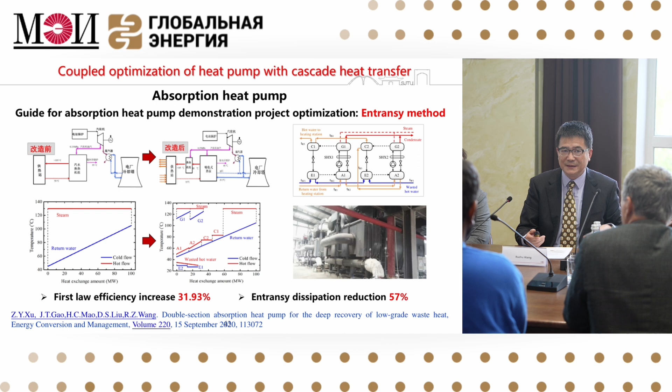So in this case, we need to find some solution. So what we proposed is to find heat from the cooling water tower. The electric power station's cooling water tower in winter time is still about 30 or 35 degrees centigrade. And then we try to combine with the lithium bromide water absorption heat pump, to make good use of 35 degree waste heat by absorption heat pump, upgraded to about 80 degrees.

So in this case, the second figure, you see the red line steam and then the return blue line. So these areas reduce a lot. This is actually what we call entransy dissipation reduction. So it's a kind of new design, and also this project is very big, actually this project is 290 megawatt. So it's a very good contribution for the local winter heating.

And in consideration, this kind of absorption heat pump capacity is so big. So at last we decided each unit with about 60 megawatt. So in this case, 60 megawatt, we need to manufacture in the factory, then long-distance transportation there, and then install there, connect again, to build the full plant for this kind of waste heat recovery unit.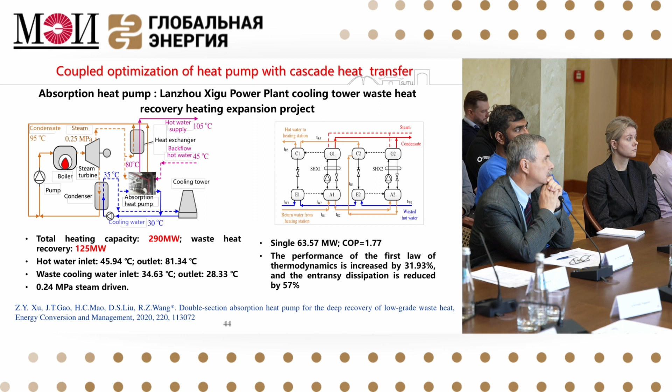And this just shows 290 megawatt, and we recover waste heat about 125 megawatt. And so in this case, we have a COP value of 1.77. That means nearly about 77% waste heat. Actually, for the heating from 50 degrees to about 80 degrees, we take 77% from the cooling tower. So this is a very good contribution for this project.

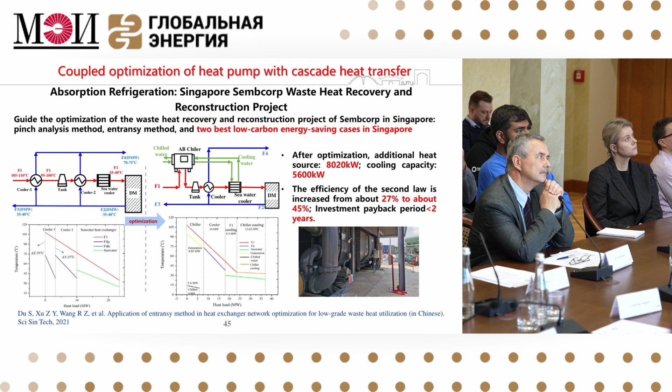And not only here, but also we exported this project to Singapore. Because when I had a vacation there, I did a speech, and then attracted the local company, Sembcorp, and they asked me, Professor Wang, we do have this kind of project with waste heat from 110 degrees, and they have 2 times recovery, and then at last release it to the sea.

So then they had the bidding process on the internet, and they said Shanghai Jiao Tong could participate. Then we participated. And at last I introduced absorption chillers, because Singapore needs cooling all the year. So in this case, the first stage, we make changes with the absorption chillers. And this changes a lot if we make an evaluation of the hot line and the cold line. So we get very uniform distribution of the heat transfer temperatures.

So in this case, we developed actually the waste heat of about 8 megawatt. We get a cooling output of 5.6 megawatt. And the payback period is less than 2 years. And also in Singapore, their news agency published it as one of the 2 best low carbon energy saving cases in Singapore.

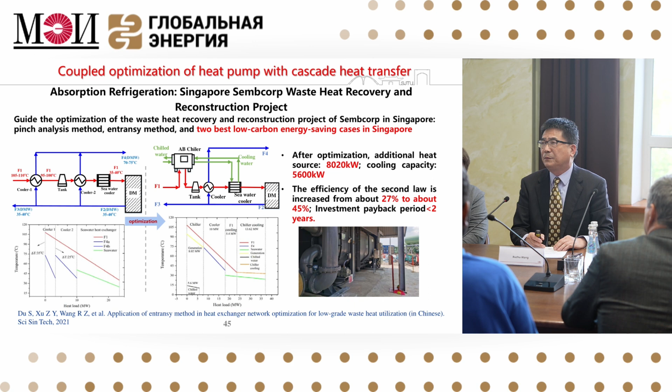So this is actually the one. Actually, that's my contribution. And then also I wanted to say something about heat pump increments for heat storage. Because now we are considering more renewable electricity, but it's not stable, so we need to consider energy storage. Most people consider battery power stations, but very few consider thermal.

So in this case, we think that thermal storage is much cheaper and also very safe, but we need to build it into the demand side. Originally, electric power generation with batteries for power energy storage is actually on the generation side. But now we consider having energy storage on the demand side. It's inside the cities, inside residential buildings.

So in this case, now I am responsible for larger scale heat storage, regulation of thermal energy with heat pumps. This is a new huge project in China. And I think we may have this kind of progress. We try to consider, by so-called electricity to energy, what we call energy increment storage by heat pump, because a heat pump can absorb ambient energy or waste heat. So if we have 1 kilowatt of electricity, you get nearly 4 kilowatts of heating stored into the storage.

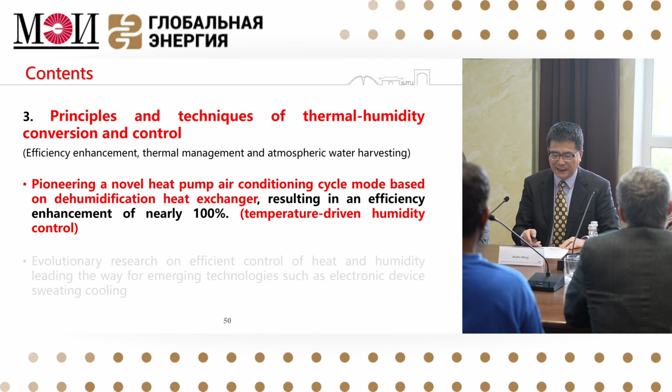And lastly, I'll say something about thermal humidity conversion and control. We pioneered a novel heat pump air conditioning cycle, trying to make air conditioning energy efficiency 100% increased. So this just shows a normal room air conditioner. Electricity consumed is 50% to 60% for cooling, but another 40 to 50% for dehumidification. So this is the normal use of an air conditioner. In this process, you release condensing heat to the environment.

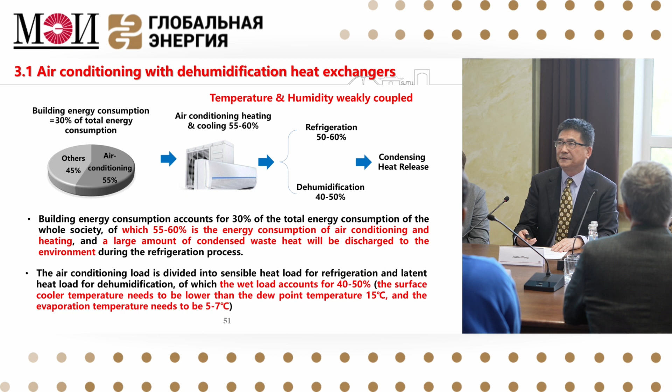So then I made some changes. I think electricity possibly we consider 50 to 60% for refrigeration. But the condensing heat, could we use this condensing heat for dehumidification? So in this case, maybe 50% of this condensing heat could be used for dehumidification. Then dehumidification will not consume electricity. So in this case, you get the energy efficiency, the COP value, 100% improved.

So then we developed so-called water-absorbing heat exchangers. Actually, the normal evaporator and condenser are now covered with desiccant materials. Originally for cooling, we need about 5 to 7 degrees for evaporation, because for air conditioning, at 26 degrees and 50 to 60% relative humidity, normally you have a dew point of about 15 degrees centigrade. So you need a cooling surface less than 15 degrees. So most are designed at 10 to 12 degrees for the evaporator inside the room.

But in this case, you need a very low evaporation temperature, so the efficiency is not high. Conventional efficiency for an air conditioner is about 3.3 or 3.4, with an evaporation temperature of 5 degrees and condensing temperature of 52 degrees. This is the Chinese air conditioner national standard. Now I made two changes. Evaporation temperature increased from 5 to 15 degrees and condensing temperature reduced from 52 to 45.

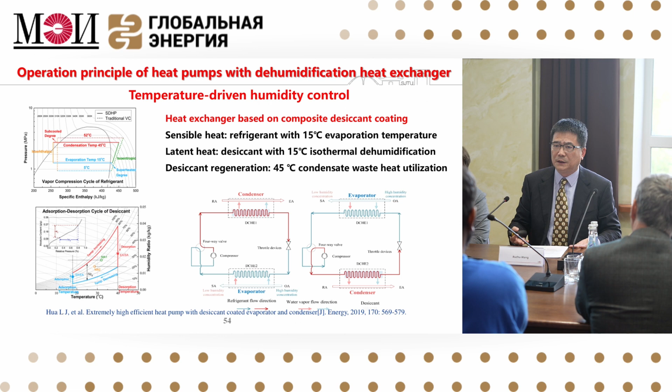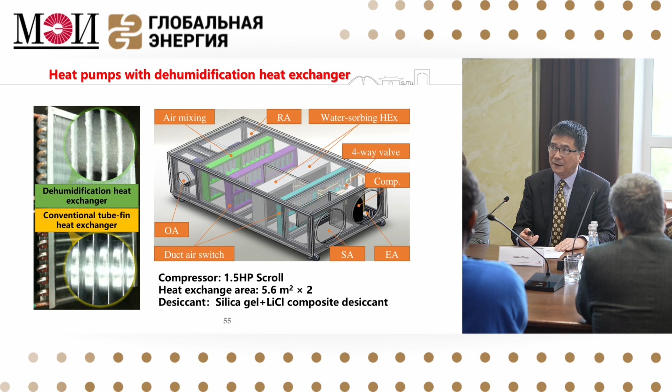So in this case, we developed the system, and we use a 1.5 horsepower scroll compressor, and then demonstrate with this kind of system. We have a flash, but it's not available here. But actually, we increase COP value from 3.2 up to 6.2. It's nearly 100% increased.

So with this kind of increase, I need to find an industrial partner, because the original research was funded by the National Natural Science Foundation of China, just to show this is feasible. And when this is feasible, then I need to come to the company to find the collaborations. So they developed different kinds of models. Then at last, I found the company, the so-called Merak. This is a joint venture between China and Germany.

And this company is nearly about a 30% supplier of air conditioning for train vehicles in China. Train vehicles, especially the metro in China, are now very popular, because in Shanghai we have nearly about 600 kilometers. And now in China, we have so many high-speed trains. So in this case, now we have good collaboration with them.

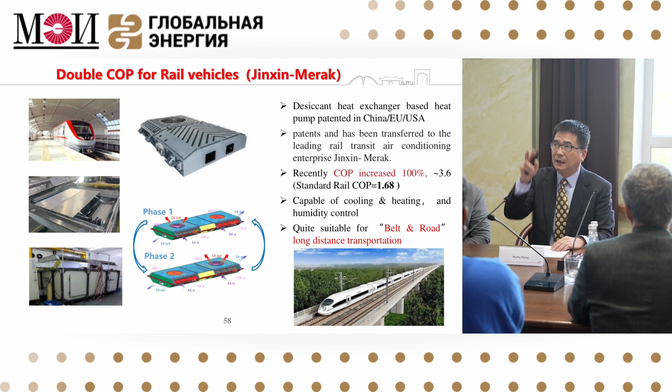The original Chinese standard COP for this is 1.68. Now we have already reached 3.6, so a 100% increase. So now we are in collaboration with the company on the next demonstrations in the metro train vehicles, and then next for the long distance high-speed train.

So this research also opens other possibilities, because we are using this kind of desiccant to handle humidity. And then I proposed some new solutions for efficient control of heat and humidity. So we created so-called sweating cooling. Using adsorbent to absorb moisture, for example MOF materials, this could be used for the cooling of electronics, because if the electronics' power consumption is lower, then the temperature is lower.

During that time, the adsorbent could absorb moisture from the air. So then it's stored with moisture, but when the power goes up, the heat will be used for the desorption. In this case, it will suppress the temperature lift. So this is actually the concept, so-called sweating cooling.

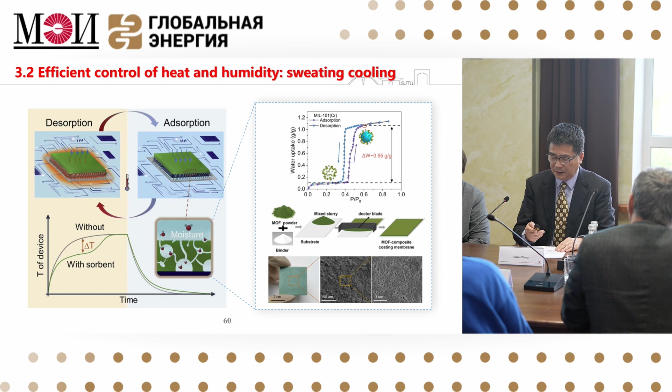And so we developed this model and then also tried it in 5G mobile phones. My research group contributed to the 5G stations, for the heat exchangers, and also to the cooling of 5G mobile phones, in collaboration with the Chinese company Huawei. And now they told me that we contributed to more than 10 million units of 5G station cooling, and also more than 10 million units of mobile phone cooling.

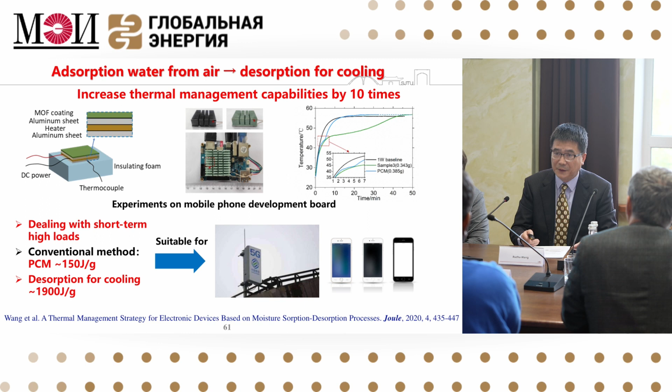So we contributed, and now we are pushing another possibility. With this kind of process, we could reduce the temperature increase by maybe 8 or 10 degrees during a peak time of about 30 minutes. So this is our research. And then I tried this coated on the 5G mobile phone. The test used only 1.7 grams of MOF materials, and we found that the heat dissipation could be increased by more than 10%.

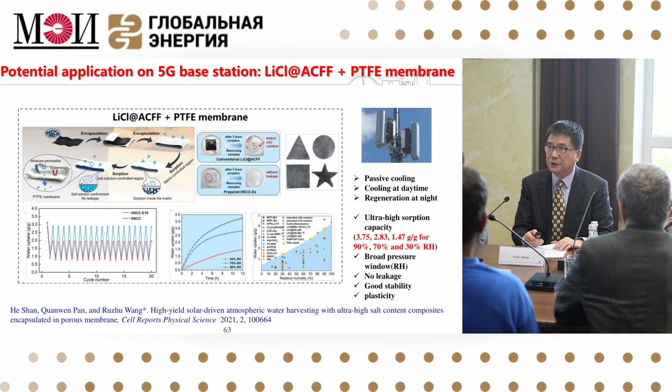And when you run the AnTuTu score, which evaluates the mobile phone for when young people want to play games, the performance improvement is about 20%. And now we are pushing these new technologies, adsorption materials, for 5G station cooling. We already have very good results, and I'm pushing the collaboration with Huawei for the next improvement.

We also did research on an air humidity assisted adsorption thermal battery, because if the adsorbent material adsorbs moisture from the air, it will release adsorption heat, which is much higher than PCM latent heat. So we did this test and developed some modules, and we could continuously get output with stable temperature and stable heating output. The energy storage density could be about 240 kilowatt hours per cubic meter. This shows that it could be more acceptable for thermal storage.

And also recently we used the technology for solar-driven atmospheric water harvesting. So this is another new area, right? What we have demonstrated is that for such a unit, with a 1 square meter solar collector, we could get nearly about 1 kilo of water daily under 1 sun. So now we are seeking more possible applications of atmospheric water harvesting.

And for this, I received the International Thermal Science Memorial Award from the Heat Transfer Society of Japan, the so-called Nukiyama Memorial Award, and also from the International Institute of Refrigeration, the so-called Gustav Lorentzen Medal.

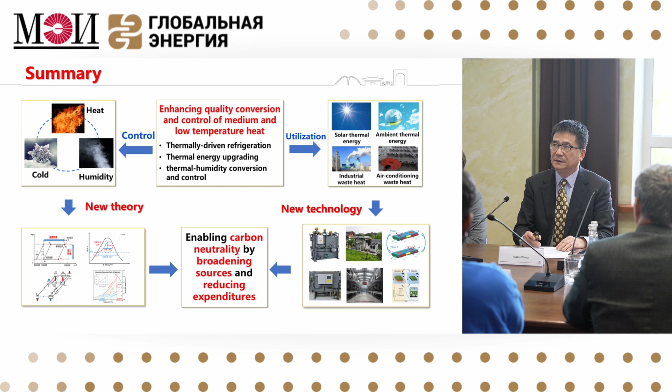In this case, we need to develop some new theories like heat and mass recovery, like variable effect absorption cooling cascaded with steam vapor, and also desiccant-based air conditioning systems. And we try to make good use of solar energy, ambient energy, and industrial waste heat, or even air conditioning waste heat. So we developed some new technologies and commercialized them. In this case, we could enable carbon neutrality by broadening sources and reducing expenditures.

So my acknowledgement to the Global Energy Prize, because I received the award for the category new ways of energy applications. We developed a lot of facilities and commercialized them, and I'm very happy to collaborate with Chinese industries and to promote new technologies that were not available before but are now popular. So much thanks to the Global Energy Association.